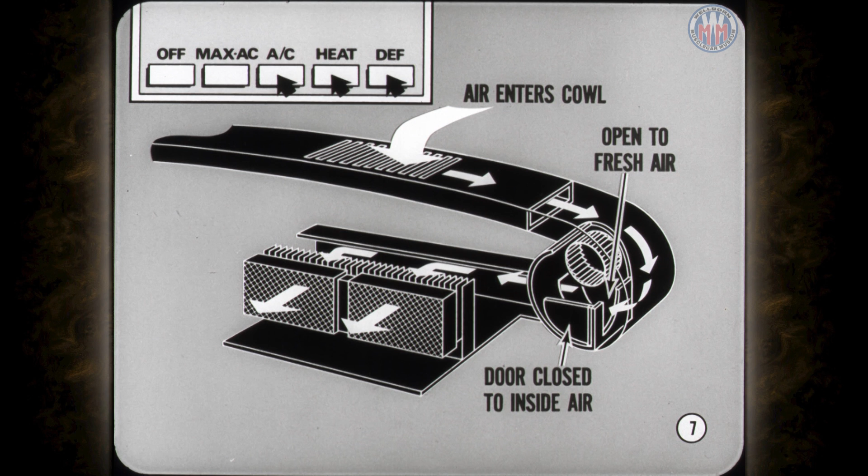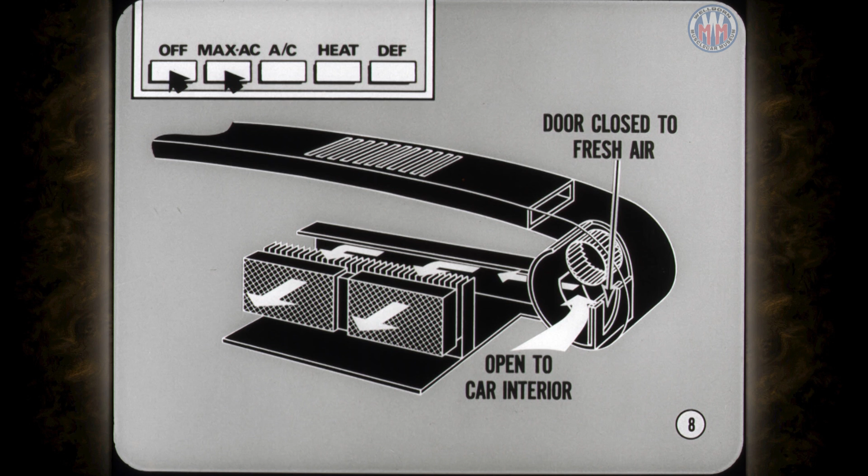Fresh air enters the cowl and flows to the air door housing. When the air door is open to fresh air flow and closed to inside air, the blower delivers fresh air to the car interior. This is the air door position for the heat, defrost, and AC buttons. When the air door is closed to fresh air flow and open to the car interior, the system operates on recirculated air. This is the air door position for the max AC and the off button.

The air door actuator rod is connected directly to the hinged air door. When vacuum is applied to the pot side of the actuator, the door is closed to recirculation or inside air and open to outside or fresh air. Vacuum to the rod side of the door shuts off fresh air and the system is open to inside air.

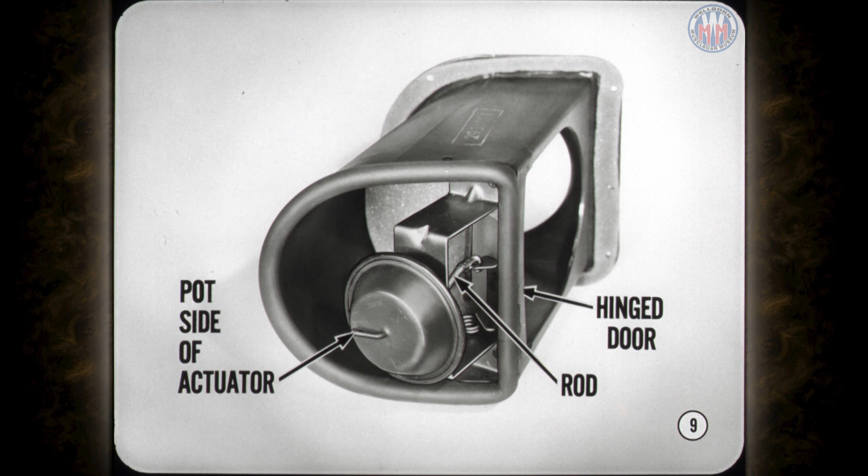There's one little detail on the air door you ought to know about. An over-center spring helps close the air door and keeps it tightly closed in either the fresh or recirculating air position. Now, if the door flutters or operation is sluggish, make sure the over-center spring is in place.

How in heck do you get at it? Remove the glove box and you can watch the action. Check the vacuum hoses, the over-center spring, or test the vacuum actuator.

Defroster, air conditioning, and heater door operation is a bit more complicated because these doors are interconnected by a system of links and levers. Tech's right. However, you should know how these doors work. Now, let's start with the heat and the AC doors.

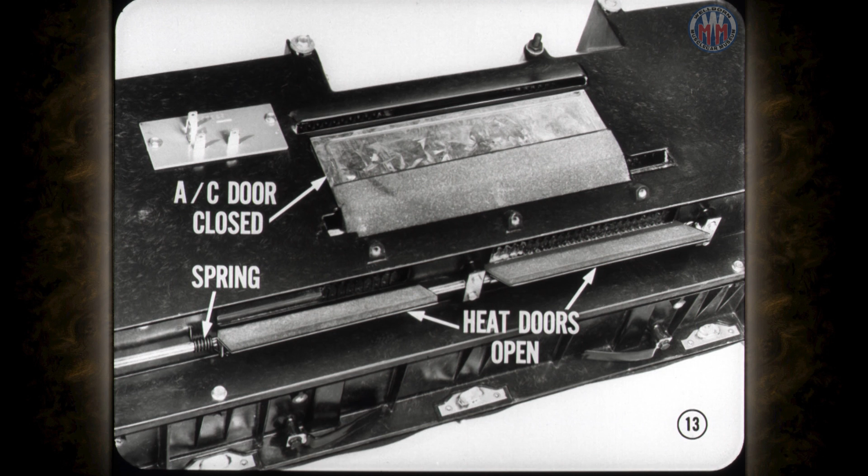When the air conditioning door is closed, the heat doors are open. Notice that a spring on the left heat door shaft holds both heat doors open. Of course, it follows that the heat doors are closed when the air conditioning door is opened.

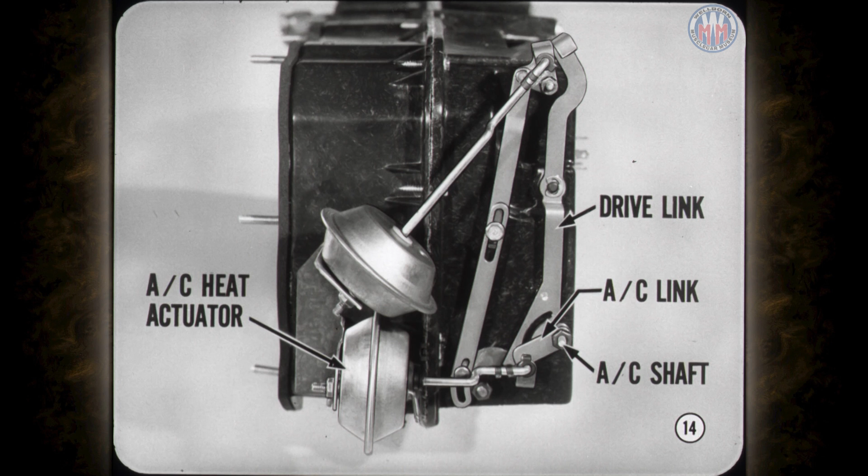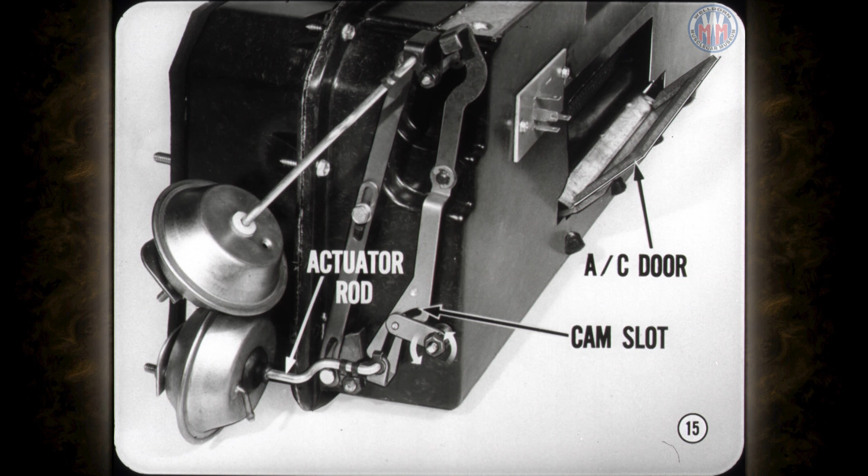Next, let's look at the AC heat actuator. This vacuum actuator is connected to a lever called the drive link. A short AC link that's part of the drive link assembly is connected to the end of the AC door shaft. I get it. As the vacuum actuator rod moves in or out, that crescent-shaped cam slot in the lower end of the drive link turns the AC door shaft to open or close the AC door.

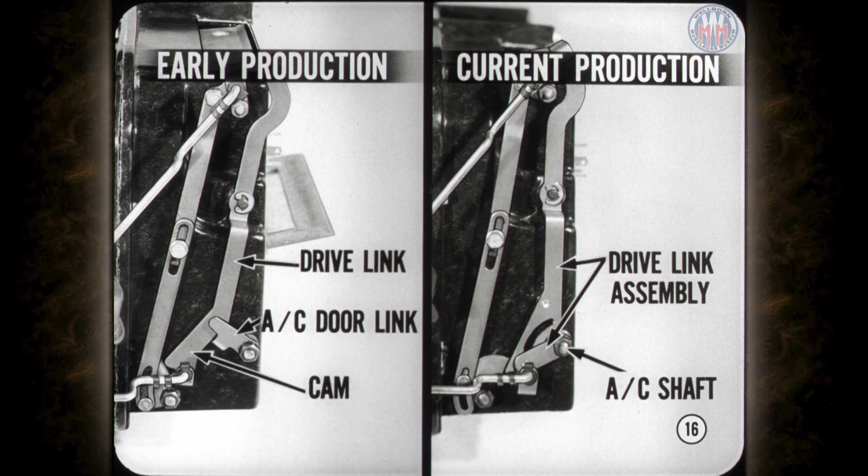Right, Don. And right here, I better tell you about early production jobs with a different drive link arrangement. On those early jobs, the drive link and the AC door link are separate pieces, not a one-piece assembly like current production. Cam action between the drive link and the AC door link operates the AC door.

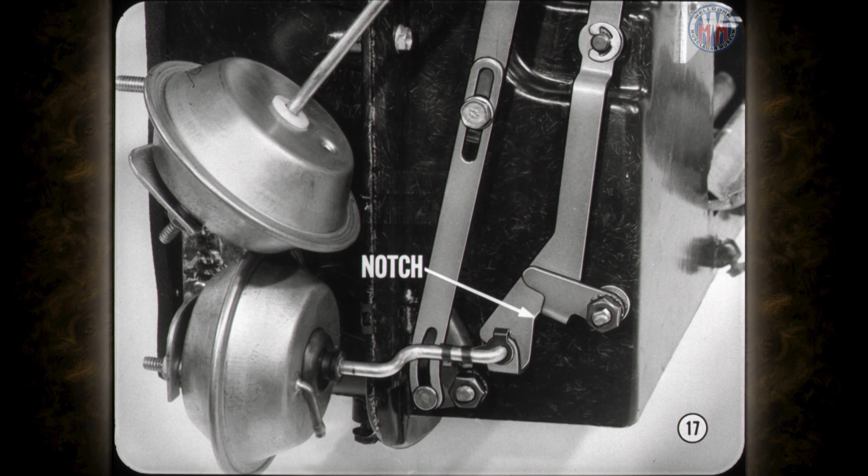If the heat and AC doors don't operate properly on an early production job, the trouble may be caused by linkage misalignment or a notch in the cam face of the drive link.

Can you replace the old drive link and heat door link with a new drive link assembly? Yes, Don. If the linkage corrections and adjustments described in the reference book don't solve the problem, you should install a new drive link assembly. I'll remember that. What's next?

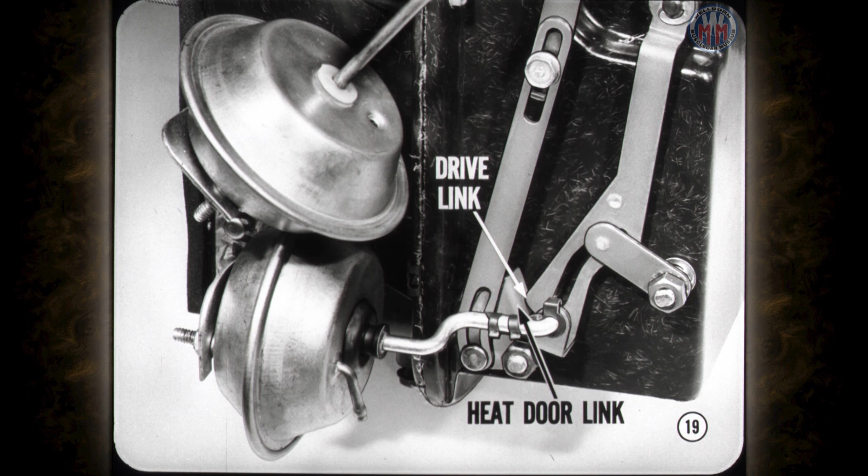Heat door operation, Don. A nose-like projection at the lower end of the drive link pushes against a cam surface on the heat door link to close the heat door. And remember, the heat door spring opens the heat door.

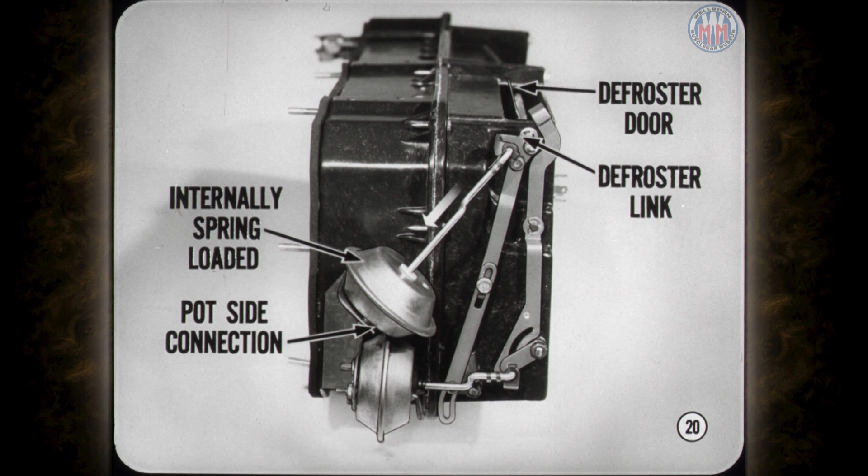The defroster actuator is internally spring-loaded on the rod side. The only vacuum connection is to the pot side, so vacuum pulls the defroster link to open the defroster door. The actuator spring closes the door.

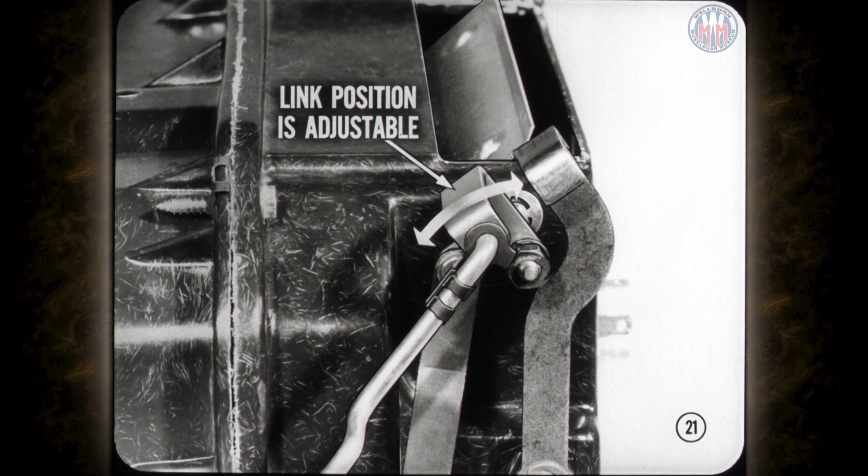The defroster door link can be adjusted to change the amount the door opens or closes. You'll find linkage adjustment instructions in recent service bulletins and in the reference book, too.

Next, let's get into air bleed. This is where the adjustable bleed linkage comes in. The upper end of this linkage is attached to and is part of the defroster door link assembly. The lower end is part of the heat door link assembly.

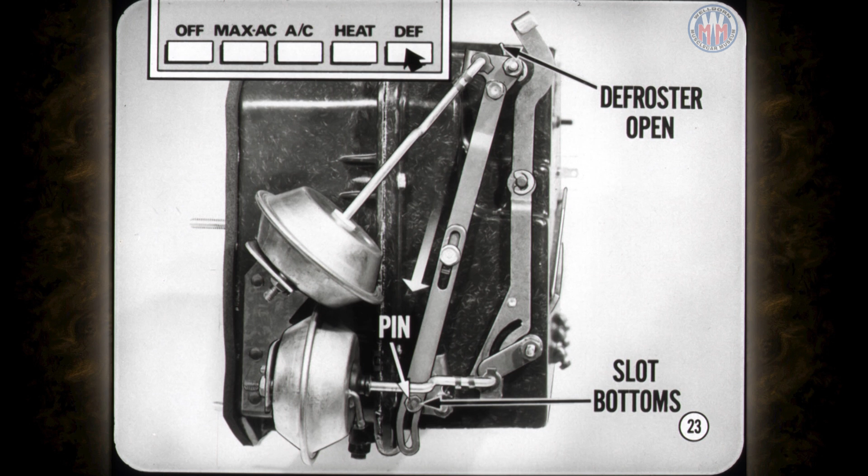When the defrost button is pushed, the defroster door opens all the way. The slot in the lower end of the adjustable link bottoms against the pin in the heat door link, and the heat door is pushed nearly closed. This provides heat bleed to the floor.

When the heat button is pushed, the upper end of the drive link provides defroster bleed. The drive link pushes the defrost door partway open against the closing pressure of the spring-loaded defroster actuator.

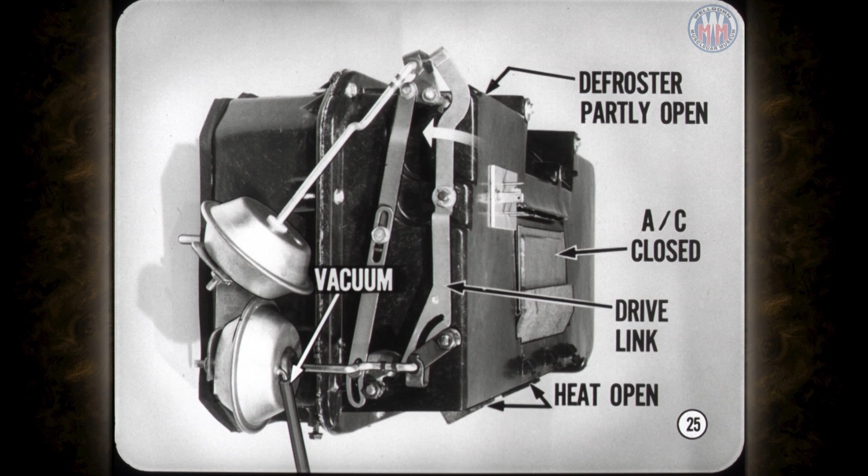Now here's how that works. Vacuum to the rod side of the heat AC actuator moves the upper end of the drive link so that it pushes on the defroster link to partly open the defroster door. The actuator also closes the AC door and moves the lower end of the drive link so that the heat door spring can open those doors.

If you have to adjust heat door bleed or defroster door position, here are a couple of gauges that will simplify the job. The reference book tells you how to make these handy-dandy tools and explains how all air door linkage adjustments are made. What's next, Joe?

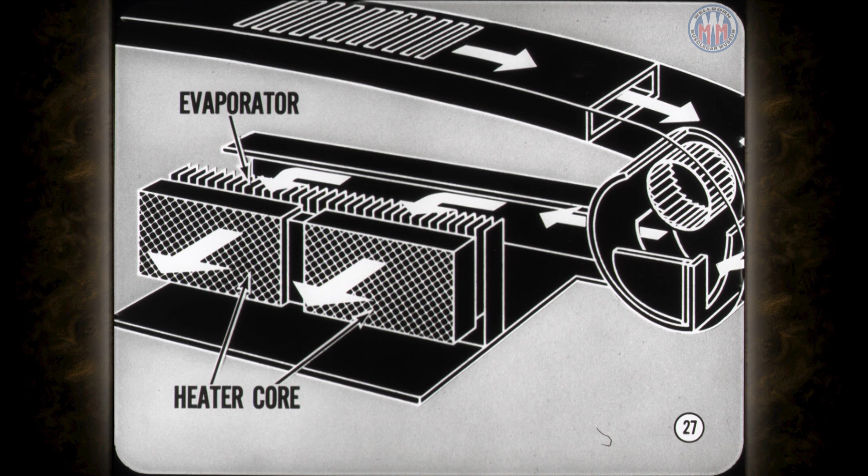Temperature control, Tech. Temperature is controlled by regulating the amount of water flowing through the heater core. That means all incoming air flows through the air conditioning evaporator and then through the heater core. The temperature control system consists of a vacuum regulator at the instrument panel control unit and a vacuum-controlled water flow valve in the engine compartment.

A cam contour at the inner end of the temperature control slide lever moves the vacuum regulator. In the full heat position, it delivers about 15 inches of vacuum to open the water valve. In the no heat position, the regulator reduces vacuum to 1 inch or less.

To check the vacuum regulator, push the heat button, remove the vacuum line from the water valve, and connect it to a vacuum gauge. With engine running, vacuum reading should be 1 inch or less in the no heat position, 8 inches in the mid heat position, and about 15 inches in the full heat position.

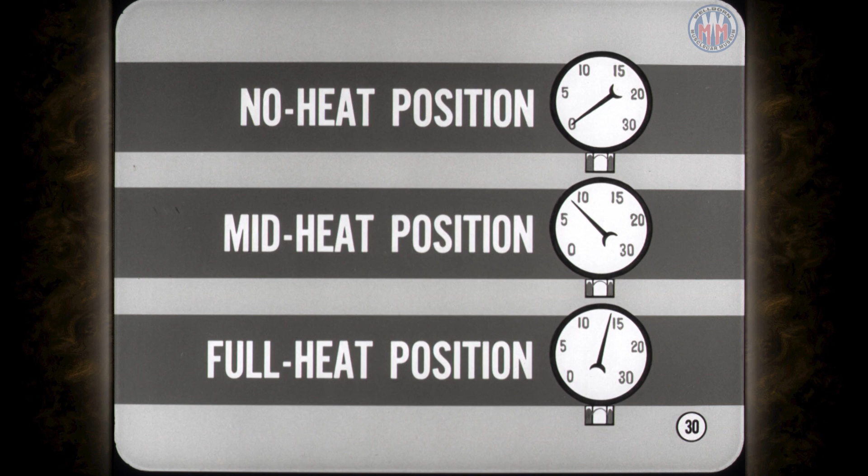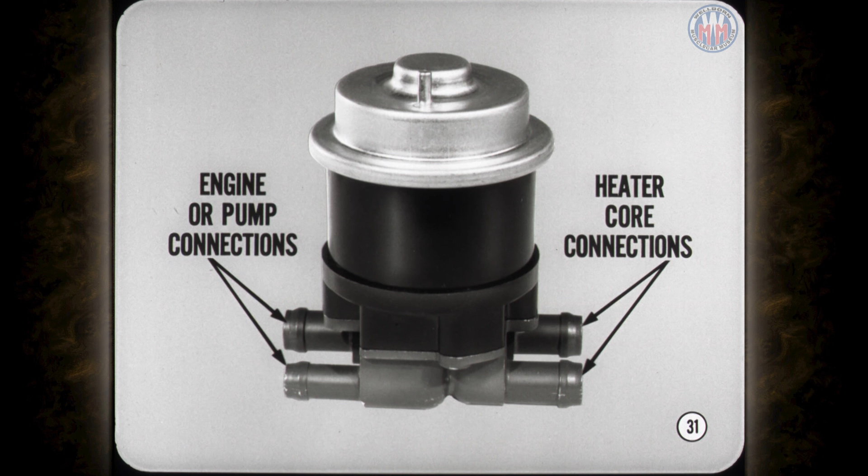How come there are 4 water hose connections at the water flow valve, and which hose connects to what? The 2 front hoses connect to the engine and water pump. The 2 rear hoses connect to the heater core. This type water valve is a combination bypass and flow control valve.

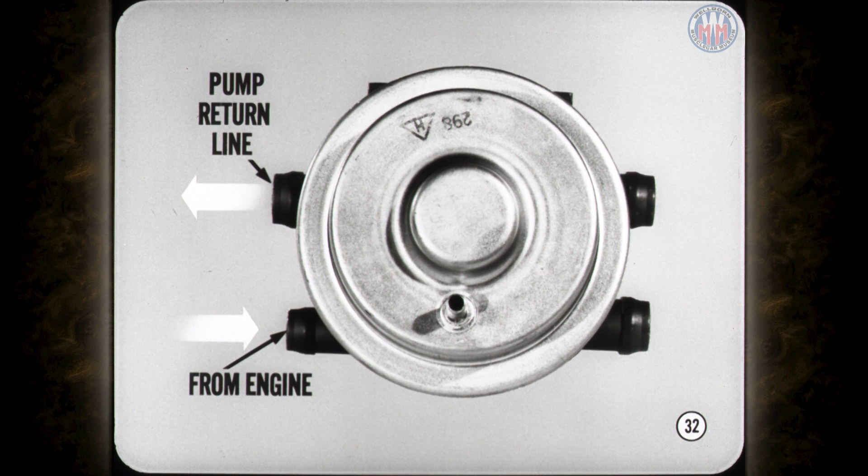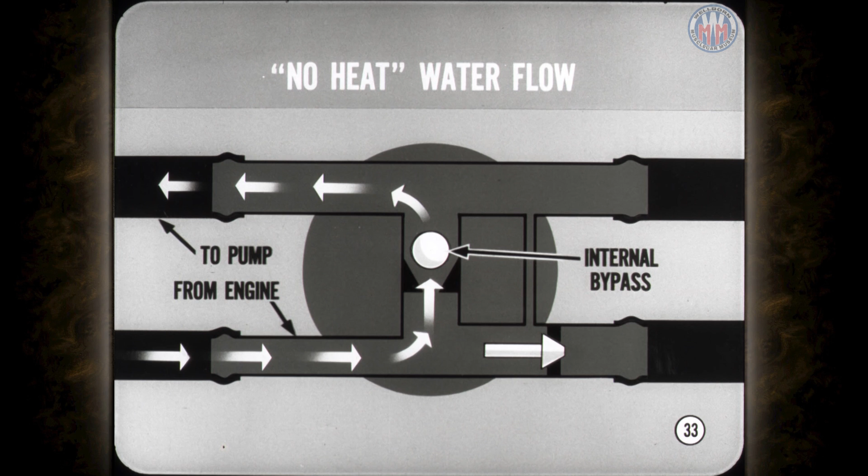The small hose connector is for flow from the engine. The other connector on the same side of the valve connects to the pump return line. In the no heat and no vacuum position, water flow is from the engine through an internal bypass inside the valve and back to the pump inlet.

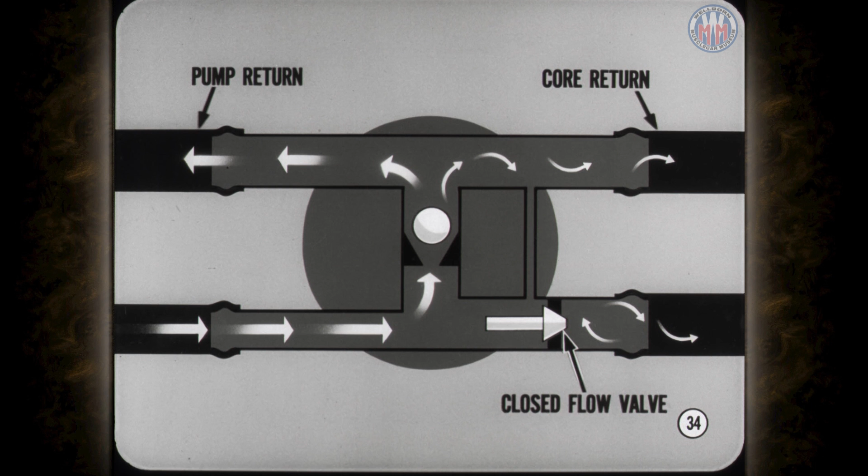Then there's no water pressure at the other side of the valve, right? Wrong, Don. Inside the water flow valve, there is always a direct passage between the pump return line and the heater core return line. However, in the no heat position, all flow through the heater core is blocked by the closed flow valve. This explains why you can't check to see if the valve is closed by removing one of the heater core hoses. You'll get a bath if you do, even when the valve's closed.

When the temperature control lever is set for heat, the vacuum regulator supplies vacuum to open the water flow valve. Water flow is then from the engine through the heater core and then back to the pump.

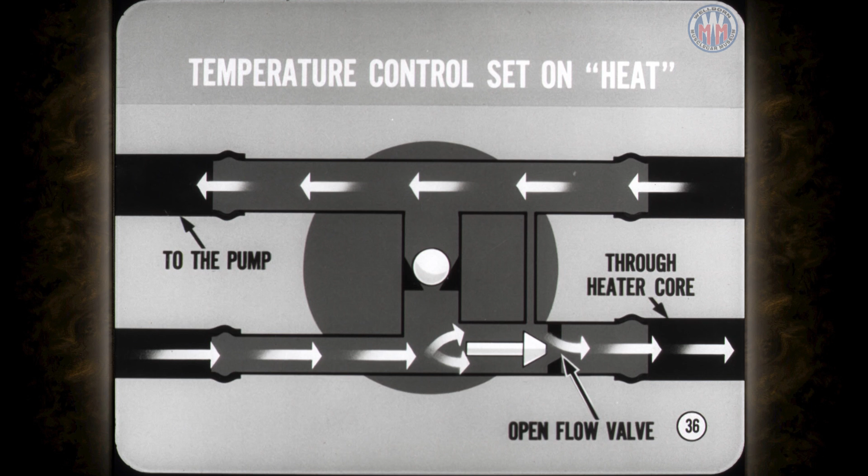To test the water valve, disconnect the vacuum tube from the valve. Disconnect and plug the water hose leading from the valve to the heater core. Now that's the one directly opposite the small hose coming from the engine. Start the engine and check for water flow from the water valve.

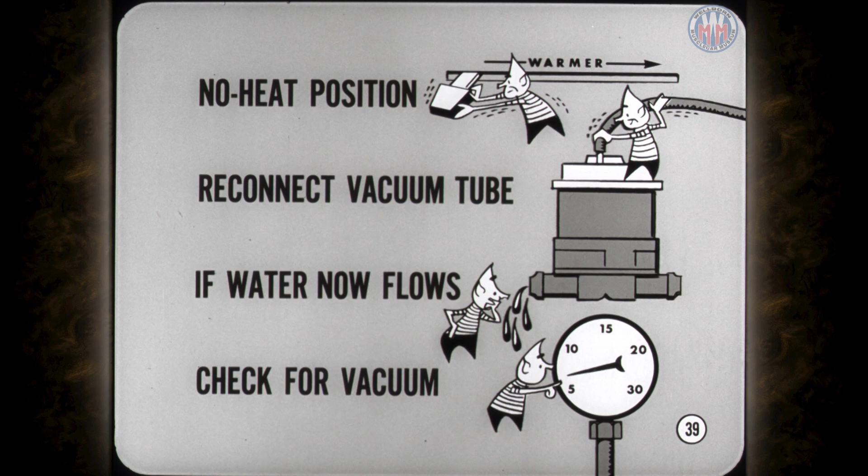With no vacuum applied to the valve, there should be no flow. Next, make sure the temperature control slide lever is in the no heat position. Then reconnect the vacuum tube to the water valve. If water now flows from the valve, check for vacuum at the vacuum tube. If there's more than 1 inch with the temperature control lever in the no heat position, something's wrong with the vacuum regulator.

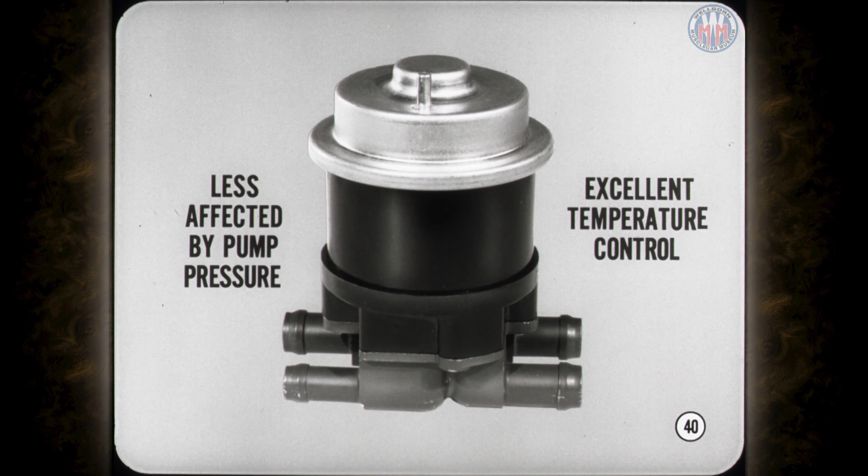What's the advantage of this valve over an ordinary series flow valve? Flow through this vacuum-controlled valve is much less affected by variations in water pump pressure. This ensures excellent temperature control at all engine speeds.

At this point, it's time to turn the record. Let's tackle the time delay relay next. It's a vacuum-operated electrical switch connected into the compressor clutch circuit. What is it supposed to do? The time delay relay energizes the compressor clutch when the defrost or heat button is pushed and outside air temperature is above 25 degrees.

This dries the air and reduces the likelihood of condensation on the windshield. Sounds mighty complicated, can you explain how it works? Sure thing, Don. The time delay relay, or TDR switch for short, has a vacuum chamber with a diaphragm.

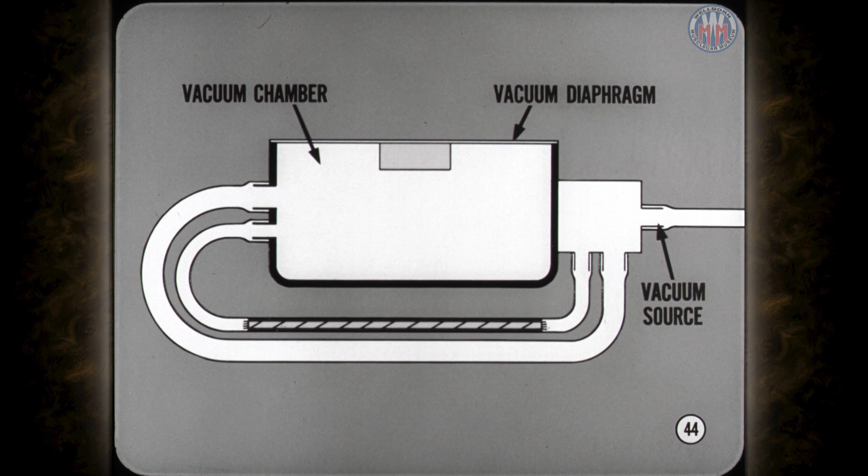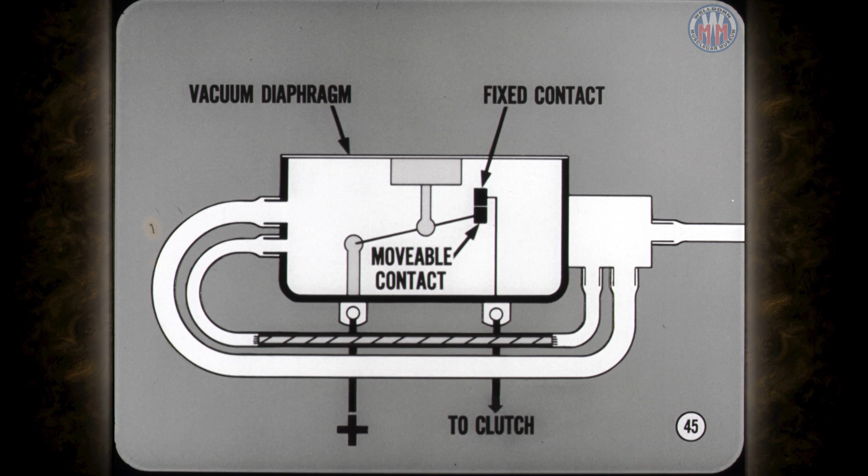A vacuum source is connected to the switch at one end. There's a set of electrical contacts inside the vacuum chamber. One contact is fixed, the other is movable and connected to the vacuum diaphragm. These contacts are normally closed, completing an auxiliary circuit to the compressor clutch. Two external vacuum tubes run from the vacuum source connection to the vacuum chamber at the other end of the switch. The smaller tube contains a restriction which slows down airflow from the vacuum chamber to the vacuum source.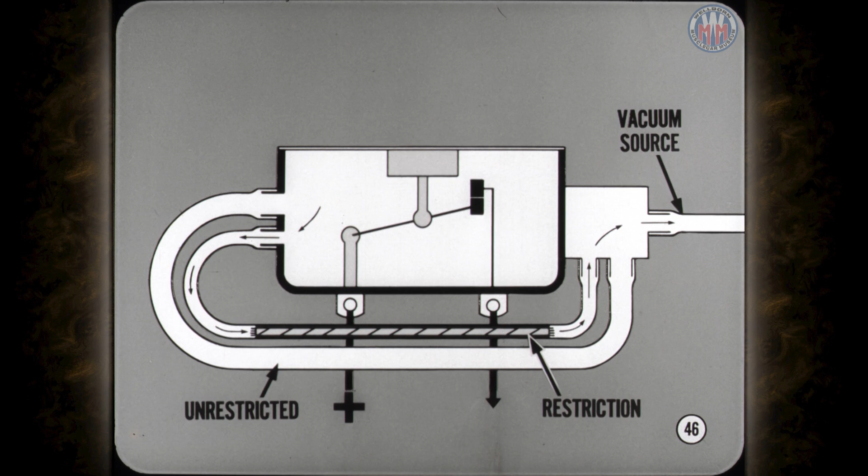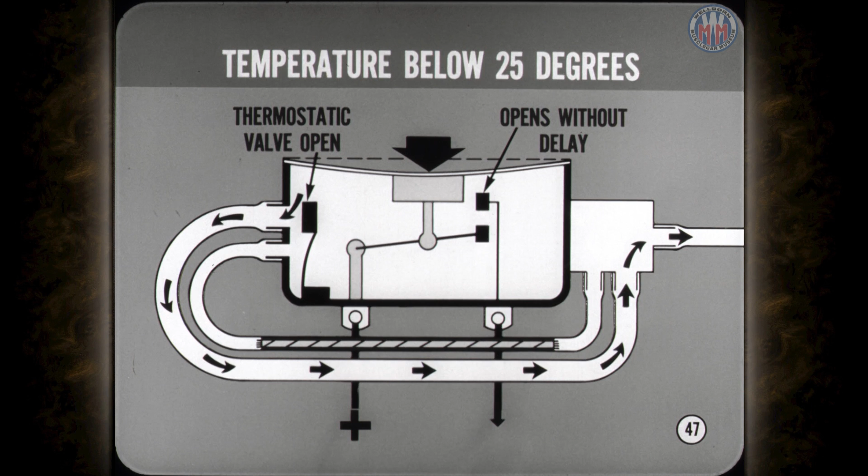When the temperature is below 25 degrees, a thermostatic vacuum valve in the vacuum chamber is open. Vacuum opens the electrical contacts without delay. So if it's cold outside, the compressor clutch doesn't engage when the heat or defrost button is pushed.

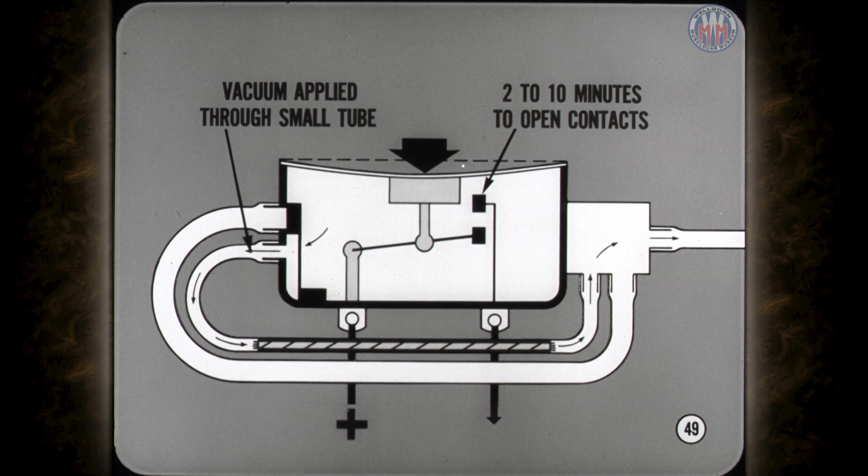When the temperature is above 25 degrees, the thermostatic vacuum valve inside the vacuum chamber closes off the vacuum passage connected to the large, unrestricted vacuum tube. Under these conditions, the only vacuum applied to the vacuum chamber is through the small tube with the airflow restriction. It takes anywhere from 2 to 10 minutes to pull enough air out of the vacuum chamber to open the electrical contacts and stop the compressor.

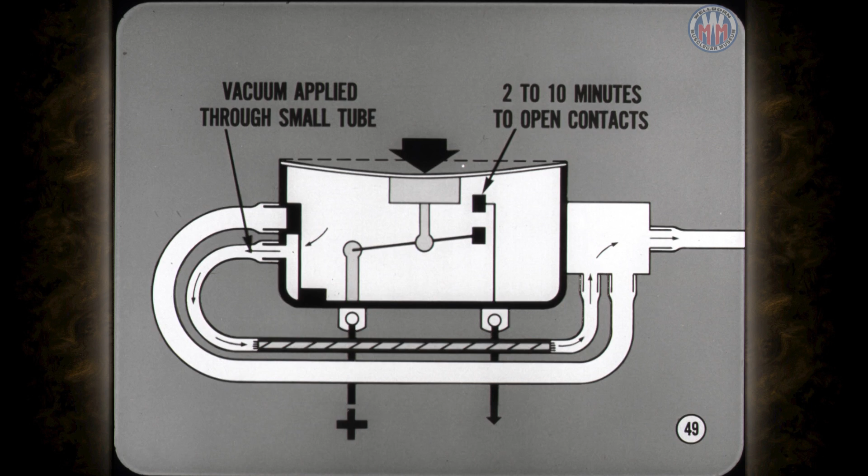In addition, a small plastic orifice is inserted in the vacuum tube leading to the defroster actuator. This restriction slows down defroster door opening. As a result, most of the moisture in the system is discharged out of the heat ducts instead of onto the windshield. Thanks for explaining how the TDR switch works, Joe, but now I have another question.

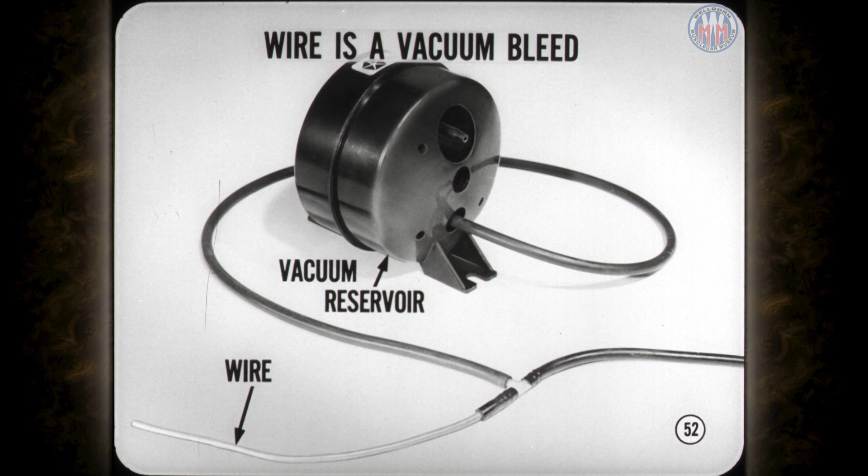Is this piece of insulated wire supposed to be stuck into this vacuum harness? You bet it is, Don, and here's what it does. That piece of wire is a vacuum bleed. You might call it a planned leak that lets air bleed into the vacuum reservoir when the engine is shut off. But why is that necessary?

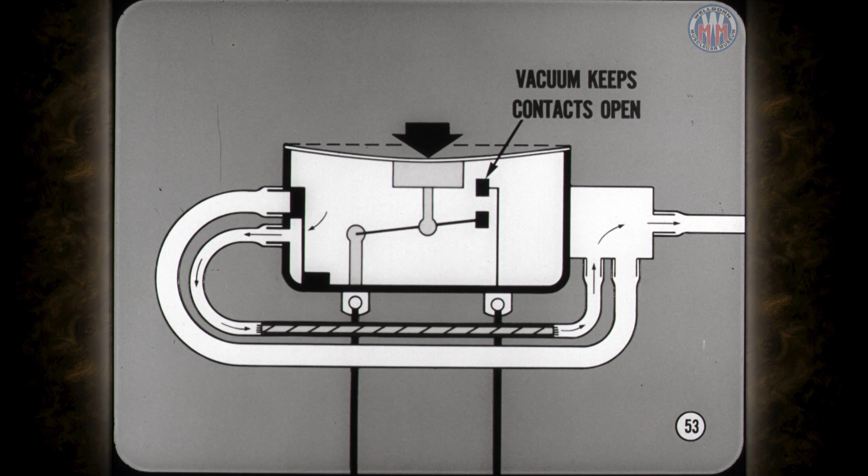If you didn't bleed the system, vacuum trapped in the TDR switch would keep the electrical contacts open. As a result, the TDR switch would not engage the compressor clutch the next time the defroster or heat button was pushed. And the TDR switch wouldn't work, right? Exactly, Don. Right about here, I better give you a quick rundown on the electrical connections and circuits that control the compressor clutch and the blower speeds.

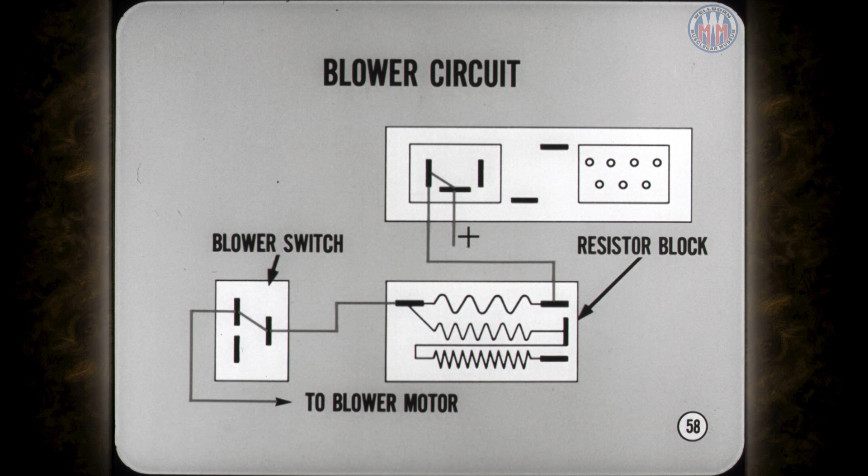6 blower speeds? How do you get 6 speeds with a 3-position switch? When the heat or defrost button is pushed, this terminal of the push-button switch does not feed the blower speed selector switch directly. Instead, the circuit goes through one of the resistors in the resistor block and then to the speed switch. When the AC or max AC button is pushed, this other terminal feeds the blower speed control switch directly without going through any of the resistors.

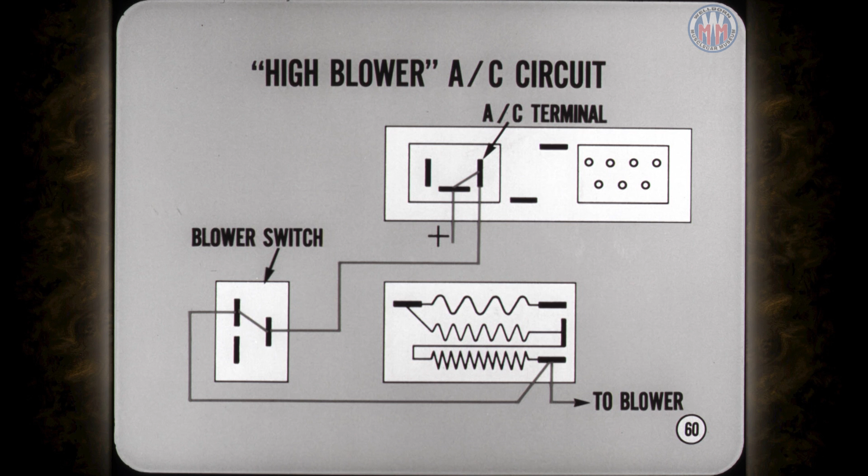In other words, for heat or defrost, there is always one more resistor in the circuit than there is for AC or max AC. That's why all three heat and defrost blower speeds are slower than the three air conditioning speeds. Thanks, Joe. That explanation will help me understand the wiring diagram.

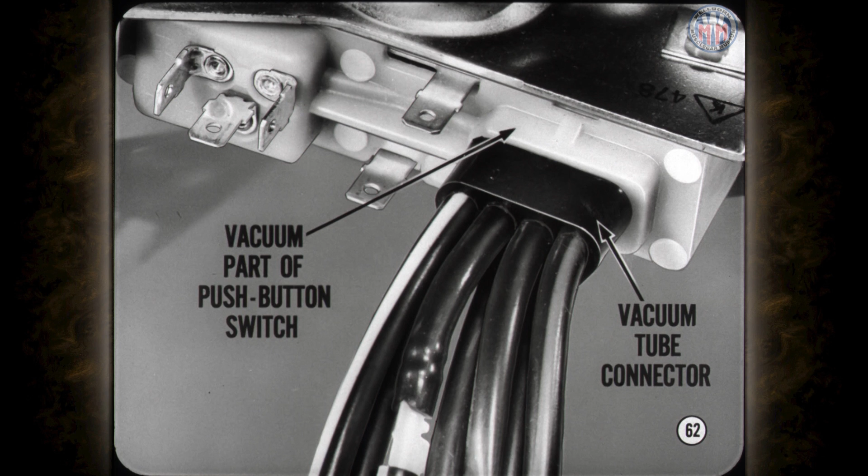What's next? Well, the vacuum part of the push-button switch is next, Don. The switch is serviced as an assembly, and you can't install the vacuum tube connector wrong. When you're trying to diagnose vacuum control problems, the most helpful thing to know is which vacuum tube does what. I'll use the vacuum tube connector to identify each tube.

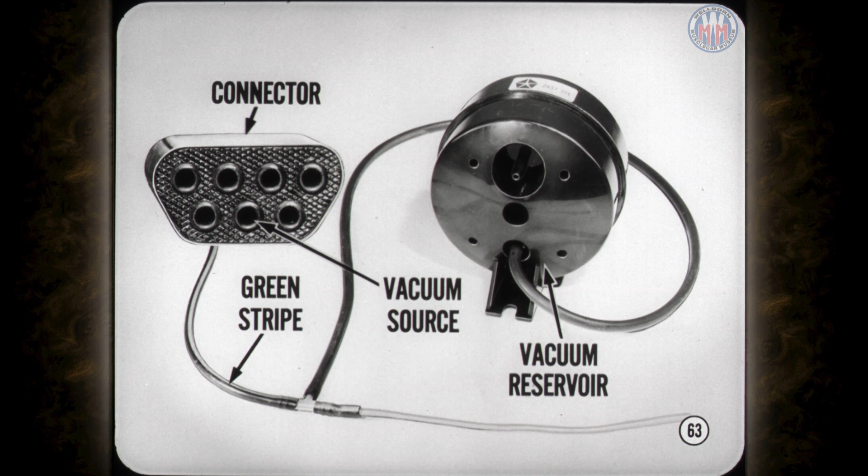This port is for the vacuum source. It has a green stripe and connects to the vacuum reservoir. Isn't that the tube that has the T connector and that vacuum bleed wire you told me about earlier? It sure is, Don. I'm glad to see you're wide awake and right on your toes.

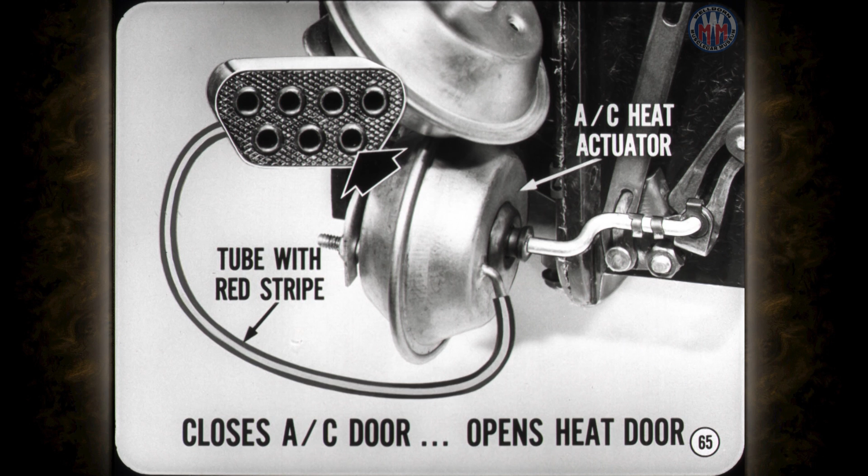This port at the right has a short tube with a red stripe, which connects to the rod side of the AC heat door actuator. It closes the AC door and opens the heat door. The port on the left has a short tube with a white stripe. It's connected to the pot side of the AC heat door actuator. Vacuum in this line opens the AC door and closes the heat door.

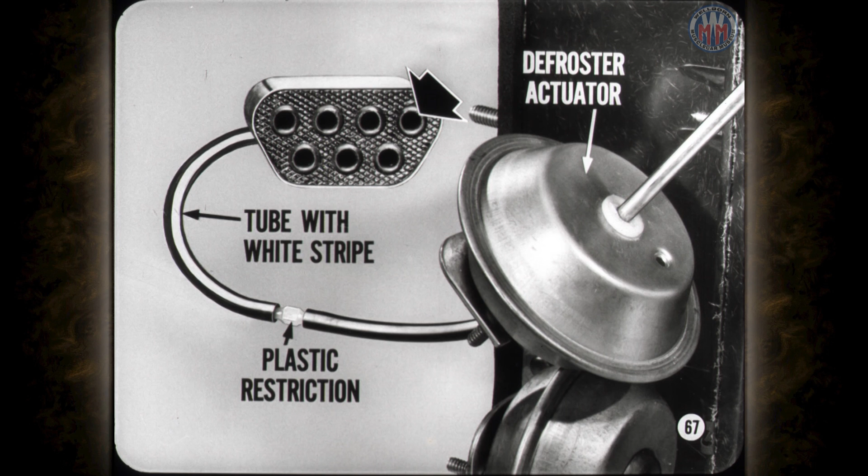This next tube with a white stripe is the one that has the plastic restriction in it to slow down the opening of the defroster door. It connects to the pot side of the defroster actuator.

Now, the white striped tube from the next port has three branches. One branch goes to the vacuum regulator for the water valve. One goes to the air door actuator, and the remaining one goes to the time delay relay. Now let's trace each of these branches.

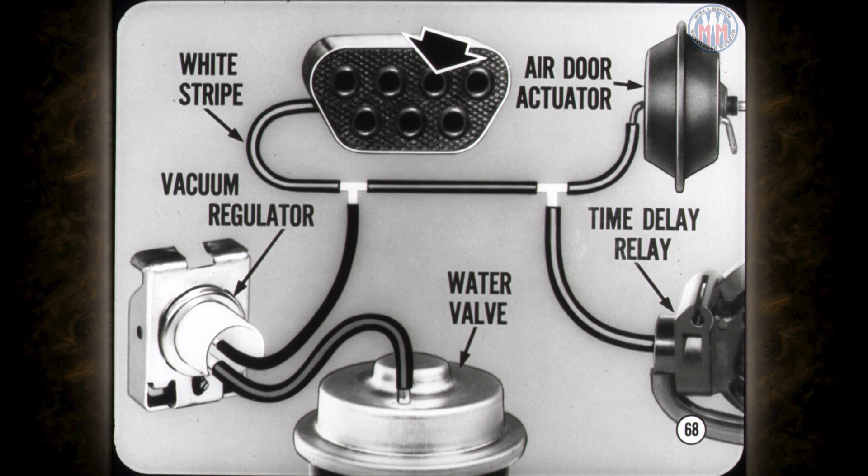The first branch goes to the vacuum regulator. From there, a larger tube with a green stripe goes to the water valve. On present production cars, there is no vacuum in this circuit when the max AC button is pushed. On very early production cars, the vacuum regulator was connected directly to the vacuum reservoir.

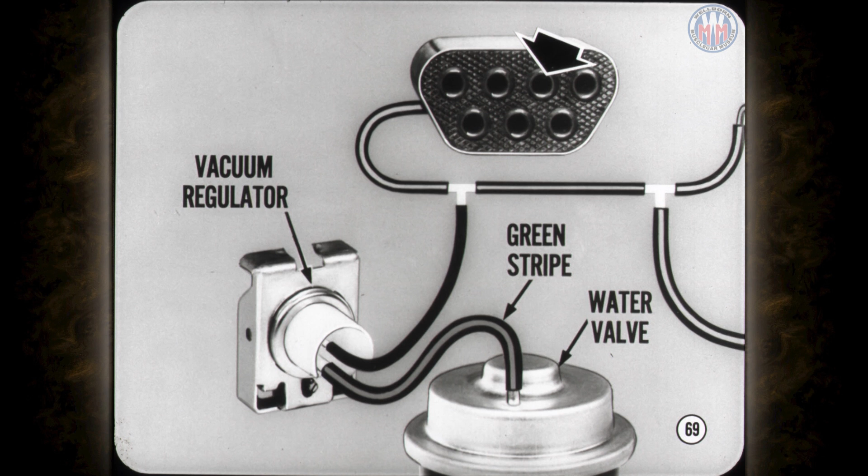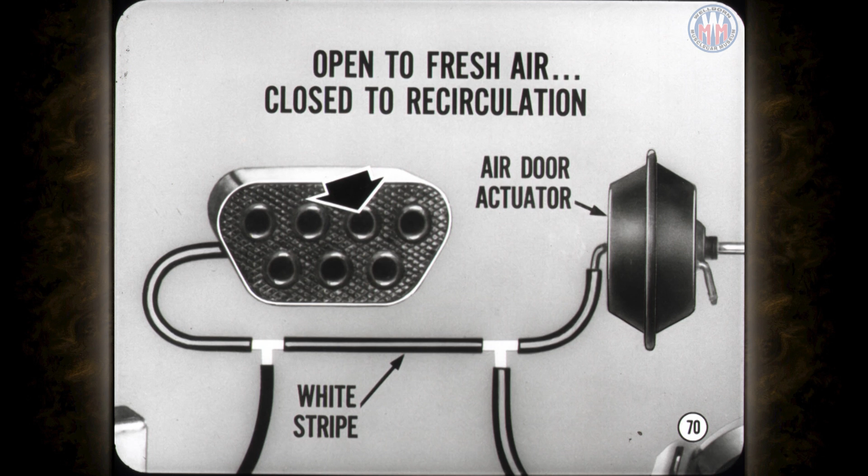The second branch goes to the pot side of the air door actuator. Vacuum applied to this tube with a white stripe opens the air door to fresh air and closes off recirculation. Branching off from this line, a white striped tube goes from this T connector to the time delay relay. This is the circuit that engages the compressor clutch when the defrost or heat button is pushed, so the air is cooled and dried before it hits the windshield.

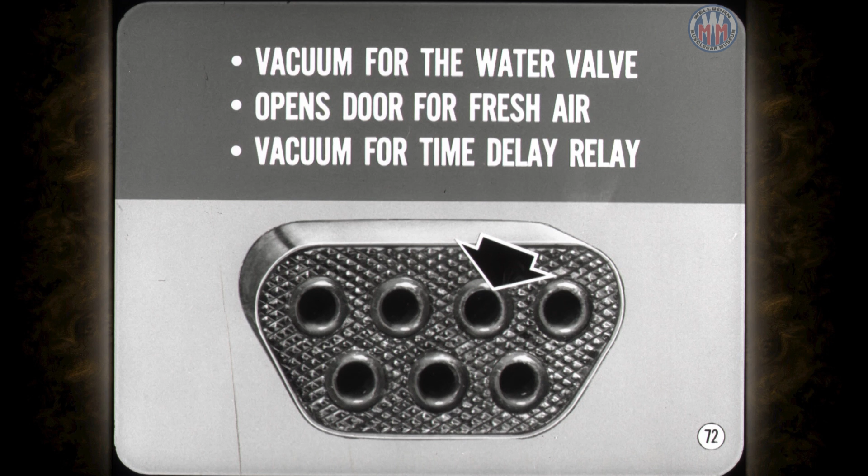But let me summarize what these three branches do. Vacuum applied through this port supplies vacuum to operate the water valve, opens the air door for fresh air, and provides the vacuum to operate the time delay relay.

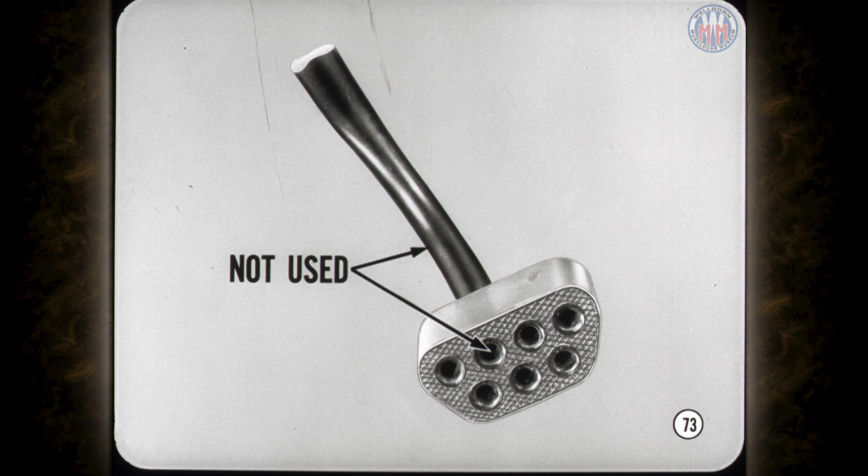This next port is the easiest of all to explain. It's plugged, and it isn't used with this particular air conditioning system. This last port also has a long tube with a red stripe. It goes to the rod side of the air door actuator. Vacuum in this circuit closes the air door to fresh air, opens it to recirculation.

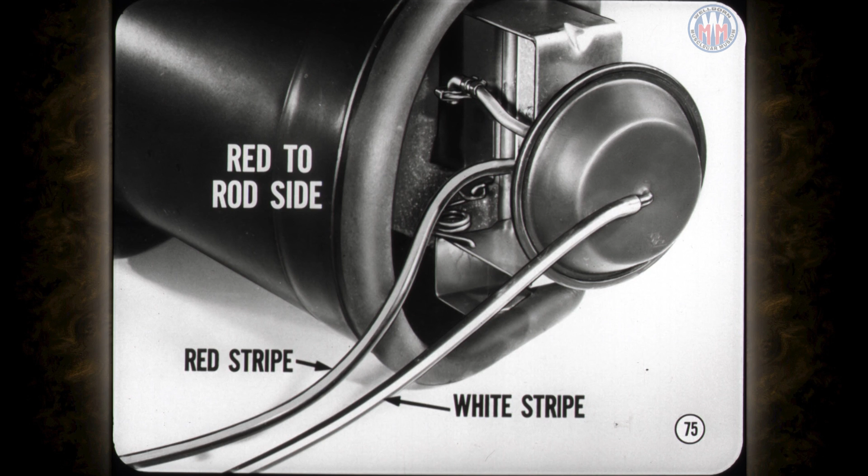The old thumb rule for hose colors and connections still holds true, Don. Tubes with a red stripe are connected to the rod side of the actuator. The white stripes go to the pot side. Just remember, red to rod side.

Is everything you've covered today in this month's reference book? It sure is, Don. In addition, there's a new control function chart that tells you exactly what should happen to every door, every unit in the vacuum circuit, and every electrical unit for all 5 push-button positions. Now, this will come in mighty handy for troubleshooting control problems.

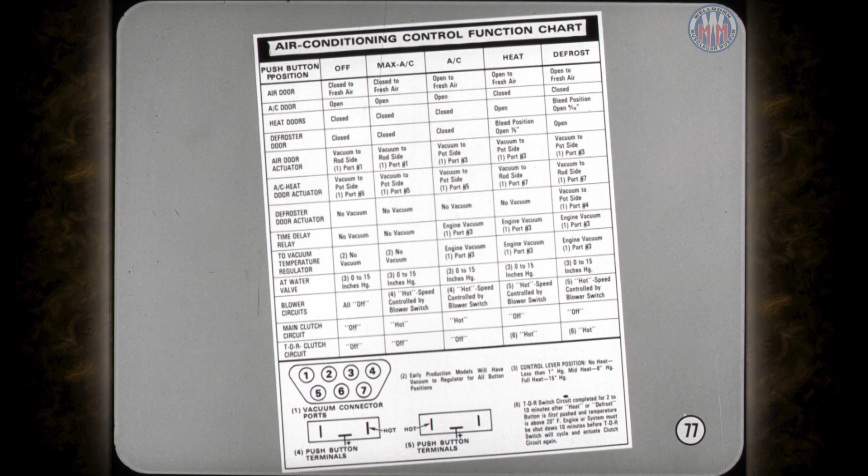I'll read this reference book at least once and then keep it handy. I'll bet the next time I'm lying on my back looking at an air conditioner, I'll be able to figure out which does what. I think you will, Don. I'm also sure that the information in this month's reference book will clear up a lot of questions for you master technicians out there and help you solve your control system diagnosis problems. Be sure and give it the once-over.